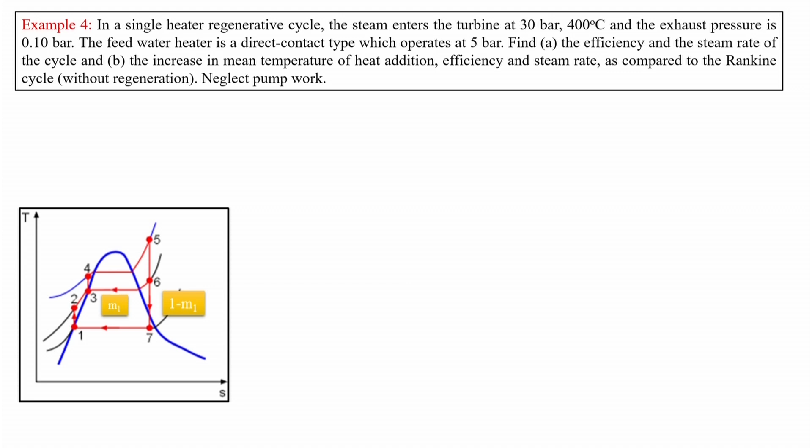We are here given with T5. So here we will see whatever it is given to us as per this diagram. We are given with T5 and that is equal to 400 degrees Celsius. We are also given with P5 is equal to P4 is equal to P3 and that is 30 bar. And then we are given with P1 is equal to P7 is equal to 0.1 bar. So these things are given to us.

We are said that P6 is equal to P3 is equal to 5 bar, and that it is a direct contact type feed water heater. Since it's direct, we know that point 3 will be a saturation point, and then we know that M1 mass which is bled from the turbine is losing its enthalpy from H6 to H3, and that is giving rise to the enthalpy for 1 minus M1 steam which is pumped, rising its enthalpy from H2 to H3. So these things are given to us.

So now let us work with this example and find out whatever it is told to us. So first, P5 is known to us. We know T5. We will go to the steam table, and then we will know the enthalpy, which is H5 is equal to 3230.9. Then we have to find out point 6, which is at 5 bar. So for that we will take entropy's help from point 5.

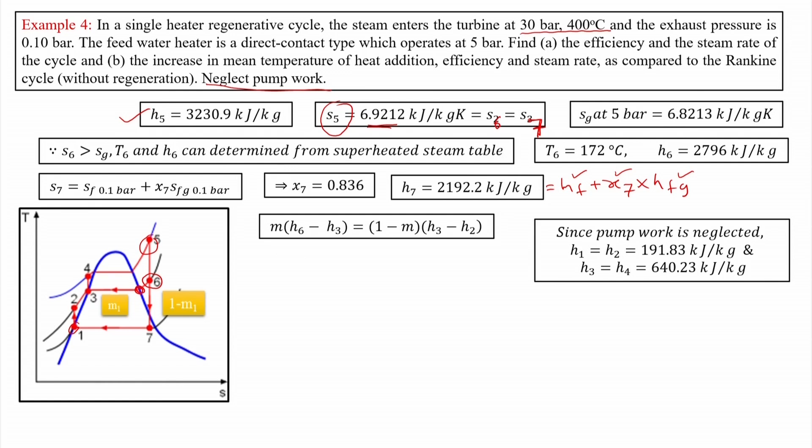Then, since a direct feed water heater is given to us, this is the formula which we were knowing. From that we can find out M, since H6 is known from the previous step, H3 is known as a liquid saturation enthalpy, and we know H2. So knowing all these things we can find out M.

Then we can find out turbine work. For turbine work we know that 1 kg of steam is expanding from H5 to H6, and 1 minus M kg of steam is expanding from H6 to H7. So we have the formula 1 into H5 minus H6 plus 1 minus M into H6 minus H7. So turbine work turns out to be 916.13 kilojoule per kg.

Then we know the formula for specific steam consumption or steam rate, which is 3600 divided by W net. But W net doesn't have pump work, so it is WT, and that turns out to be 3.93 kg per kilowatt hour.

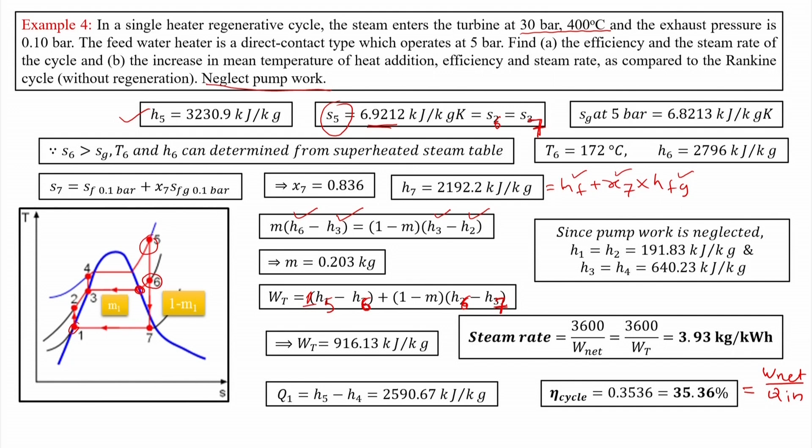Then we can find out Q1, which is heat addition from the external source, that is H5 minus H4. This is 2590.67. So this helps us to find out cycle efficiency, and this is 0.3536, which is basically W net upon Q in, and W net is equal to WT and Q in is equal to Q1. Then this example is continued.

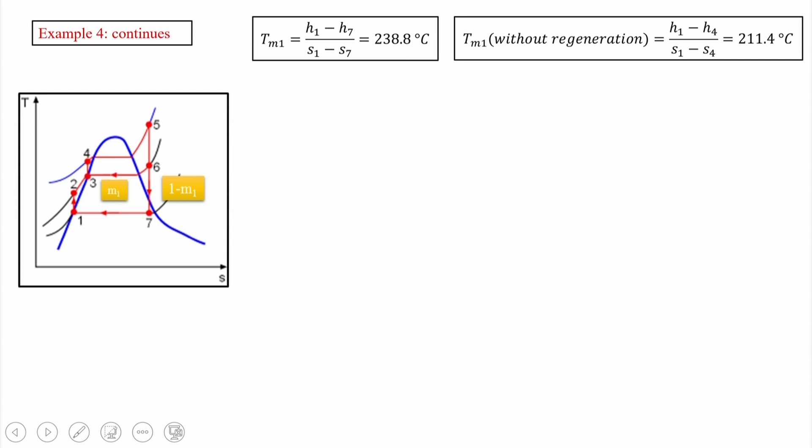We can find out mean temperature of heat addition for the cycle without regeneration and for the cycle with regeneration. So mean temperature of heat addition with regeneration is here H3 minus H5 divided by S3 minus S5. This is mean temperature of heat addition with regeneration, and without regeneration is basically H1

We have basically mean temperature of heat addition as H5 minus H3 divided by S5 minus S3. This is with regeneration, and without regeneration we have H5 minus H1 divided by S5 minus S1. So this gives us the mean temperature of heat addition to be 238.8 with regeneration and 211.4

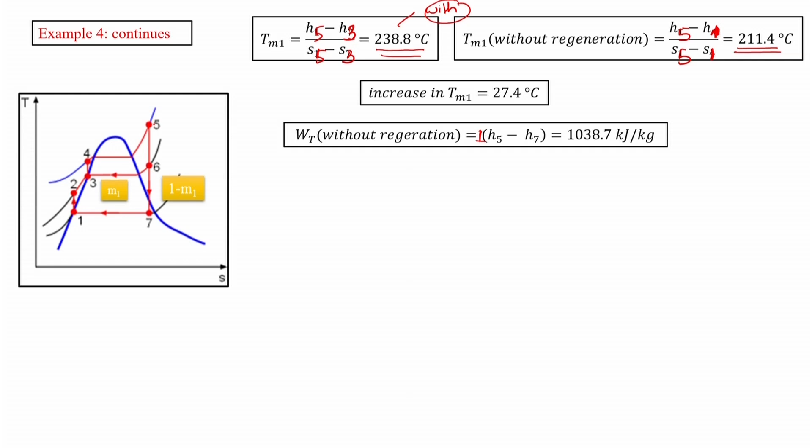without regeneration. So mean temperature of heat addition has increased by 27.4 degrees Celsius due to regeneration. Turbine work without regeneration is where 1 kg of steam has completely expanded from state 5 to state 7, so it is 1038.7. Steam rate is 3600 divided by turbine work, and without regeneration it is 3.46

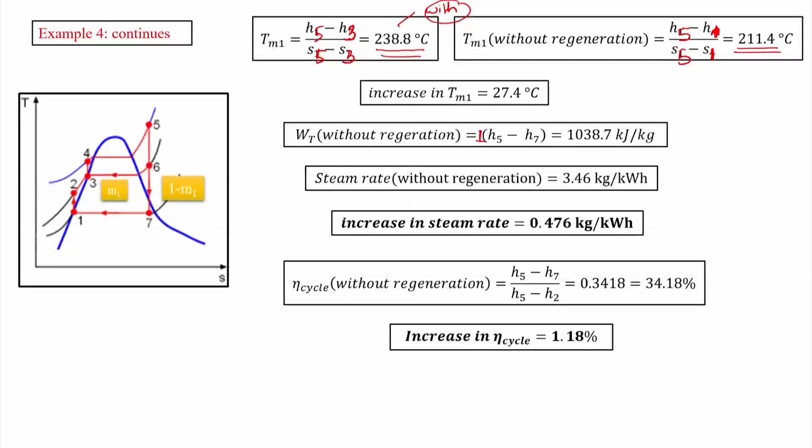kg per kilowatt hour. So increase in steam rate is 0.476 kg per kilowatt hour, and efficiency of cycle without regeneration is H5 minus H7, that is turbine work, divided by heat addition, which is H5 minus H2, and this is 34.18, but efficiency with regeneration has increased by 1.18%. So this is how we would have solved this example for the regeneration case.

Now we will move on to the next example, which says there is a mercury cycle superposed on the steam cycle. So the mercury cycle is given as a topping cycle, and the water or steam cycle is given as a bottoming cycle, with boiler outlet condition at 40 bar and 400 degrees Celsius and the condenser at 40 degrees Celsius.

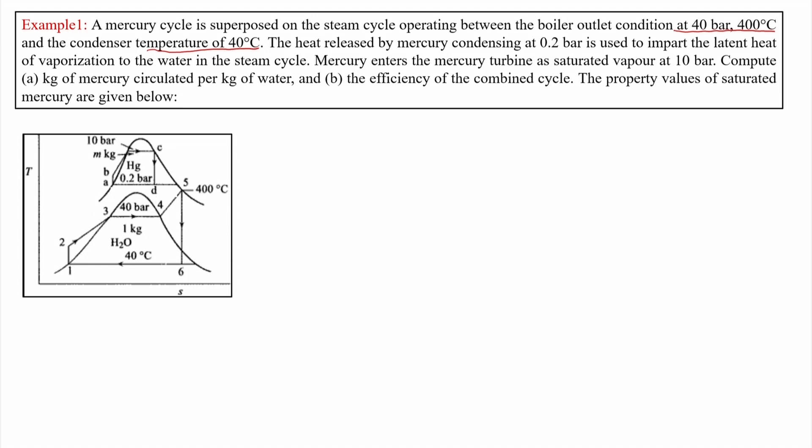The heat released by mercury condensing at 0.2 bar is used to impart the latent heat of vaporization to the water in the cycle. So only latent heat of vaporization is given by the topping cycle to the water, as mercury condenses at 0.2 bar. Mercury enters the mercury turbine as saturated vapor at 10 bar. Compute kg of mercury circulated per kg of water, and efficiency of the combined cycle. Property of mercury is given to us.

This is our diagram, which states that we have water as the bottoming cycle and mercury as the topping cycle. We are given that P3 is equal to P2 is equal to P5 is equal to 40 bar. We are also given that T5 is equal to 400 degrees Celsius, and that T6 is equal to T1 is equal to 40 degrees Celsius. So these things are given to us.

So knowing these and also the conditions for the steam and the conditions for mercury, we can solve this example. So initially, for H5, we will go to the steam table, the superheated part of the steam table. We will go to 40 bar and 400 degrees Celsius and find out H5. So H5 is known to us. From H5 we will also see in the steam table what is S5.

So S5 is known to us, but S5 is equal to S6, and S6 is equal to SF plus X6 into SFG. So from that we can find out X6. So X6 is equal to 0.8064. Then we know X6, so we can find out H6, the enthalpy at the exit of the turbine. Then we also know H1. H1 is equal to 167.57.

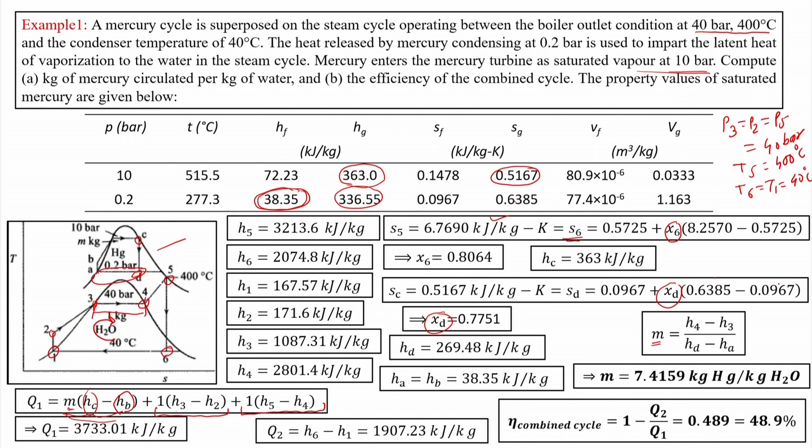We have total heat rejection, which is H6 minus H1. So we have combined cycle efficiency as 1 minus Q2 upon Q1, which is 48.9%. So we found out all the things required for us in this example.

So let us see our next example, and our next example says that in a combined gas turbine steam turbine power plant, the exhaust gas from the open cycle gas turbine is the supply gas to the steam generator of the steam cycle, at which additional fuel is burnt in the gas. So it is told that the exhaust of the gas turbine is first heated by burning extra fuel and then supplied as the flue gas in the boiler of the steam power plant.

The pressure ratio of the gas turbine is 7.5, air at the inlet is having temperature 15 degrees Celsius, and maximum temperature of the gas turbine is 750 degrees Celsius.

Combustion of additional fuel raises the gas temperature to 750 degrees Celsius, and the gas leaves the steam generator at 100 degrees Celsius. This data is also corresponding to the gas turbine cycle. So we have given all these points.

Then the steam is supplied to the steam turbine at 50 bar and 600 degrees Celsius, and this steam condenses to the pressure of 0.1 bar. Total power output of the plant is 200 megawatt. Calorific value of the fuel burnt is 43.3 megajoule per kg.

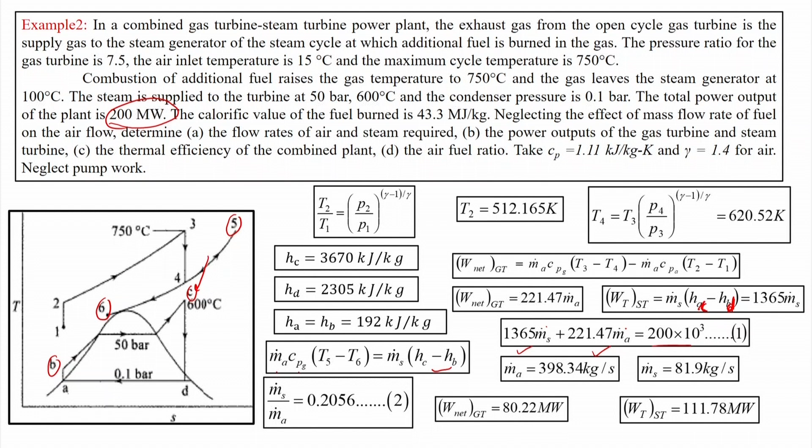So we know two equations and we know two unknowns, which is m dot A and m dot S. So we can find out first the ratio of m dot S by m dot A from this equation, which is now renewed equation 2 for us. Then this we can put over here, and then we can find out m dot A is equal to 398.34 and m dot S is equal to 81.9 kg per second. So we found out mass flow rate of steam and mass flow rate of air. Further, we found out the gas turbine's net work and the steam turbine's net work. Then we will continue with this example.

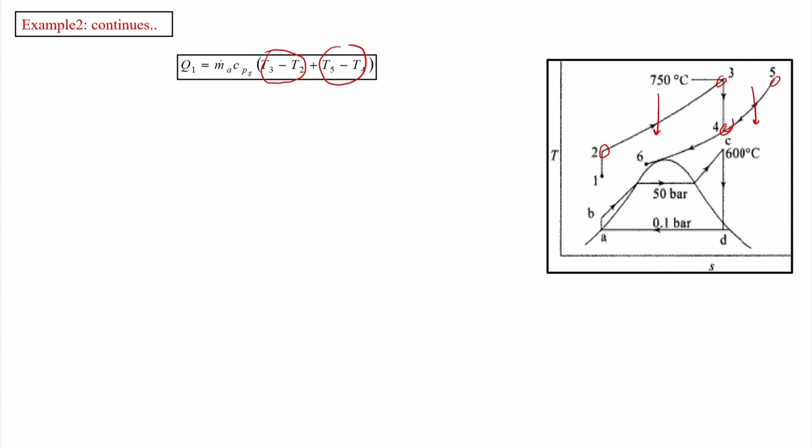So we know that now Q1 is the heat received in the gas turbine, and gas turbine is receiving heat twice basically. One is during its combustion chamber and one is before passing it to the boiler. It is also getting heated from 4 to 5. So first heat addition is rise in temperature from T2 to T3, and second heat addition is rise in temperature from T4 to T5. So knowing all these quantities, we can find out Q1 is equal to 400.19 megawatt. Then efficiency is net work upon heat supplied, and that turns out to be 50%.

So this is the total net work of the combined cycle. This is not the efficiency for the gas turbine power plant, this is the efficiency of combined cycle. The net work was given as 200 megawatt, but heat supply is only in the gas turbine. In the steam turbine we are not giving any heat. In the last example where steam cycles were coupled, we only had heat exchange in the latent part between the topping and bottoming cycle, but now with the gas turbine the complete heat, HB to HC, was given from the gas turbine. So there is complete heat exchange between two cycles and no external heat added in the bottoming cycle. So W net upon Q1 is the overall efficiency, and that is 50%.

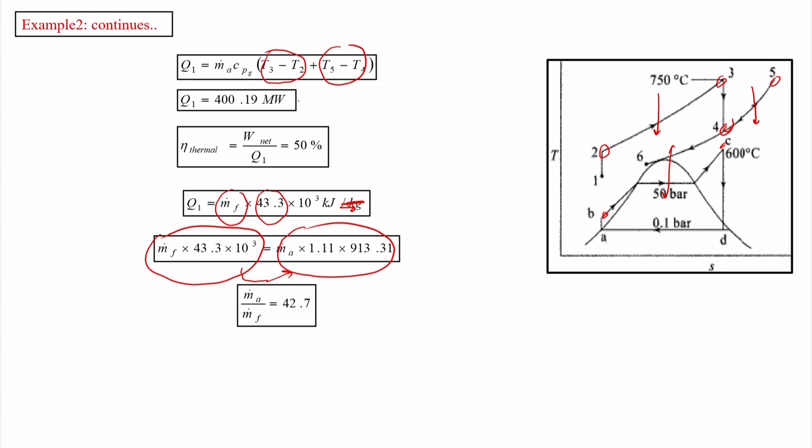So knowing this, we now know how to solve the example for the combined gas turbine and steam turbine cycle. We have also seen the examples corresponding to reheat, regeneration, superheating. With the concepts known to us from the basic theory of steam turbine and combined cycle, we are now able to solve the examples, and we have illustrated how. We will see the next part, which is our steam turbine part, from the next class.